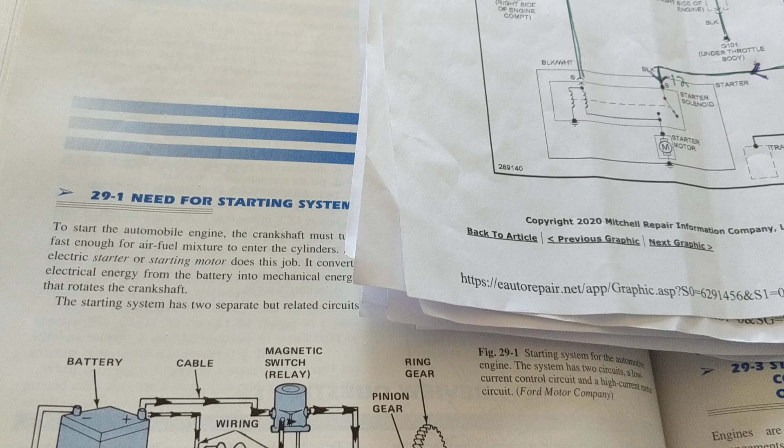Hello, welcome once again. How does a starter motor act and operate? This is a pictorial, but before we go to the pictorial, we studied the schematic. Let's take a quick glimpse at the schematic, and then we'll go back to it, and hopefully you'll have a better understanding.

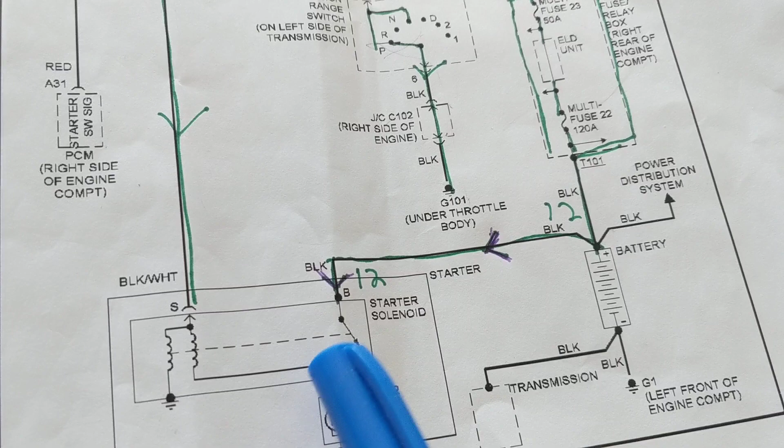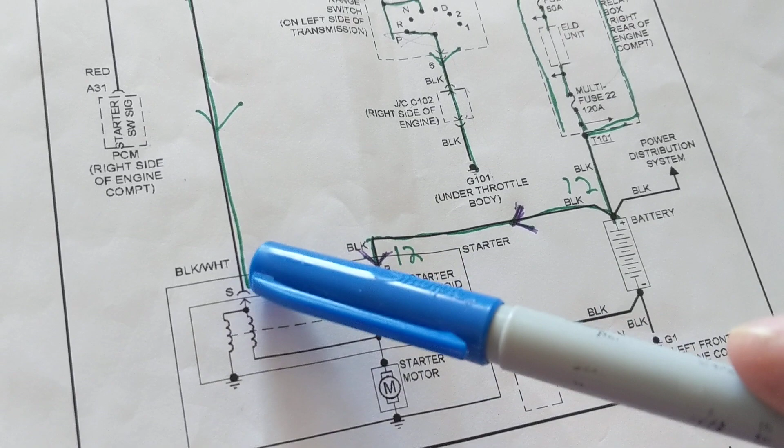The main purpose of this starter motor: there are two windings, and a relay they call a solenoid. This starter solenoid is actually a relay. It closes the contacts for the starter motor, and the most important point is for the high current to go through this thick wire from the battery. The low current also comes from the battery, but it goes through the windings and another starter relay. So low current is here, and high current, 200 to 300 amps, is through this thick wire that goes through terminal B, battery, and the other one is S.

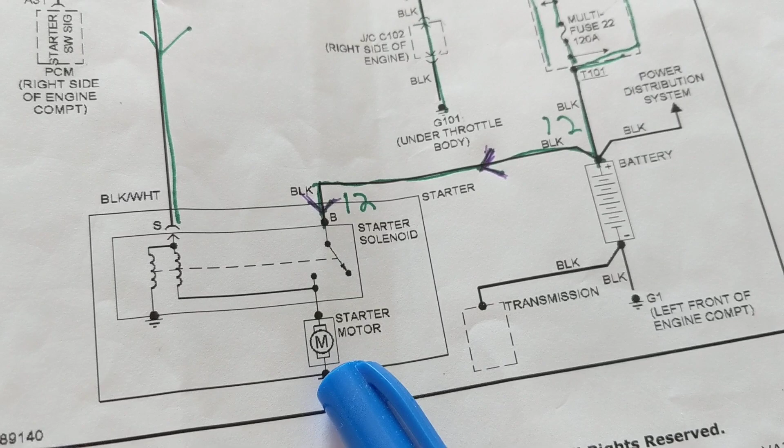Basically, we're using this to close this, to allow that high current to go through the starter motor, and the starter motor is also grounded. Let's look at it a little clearer to understand it.

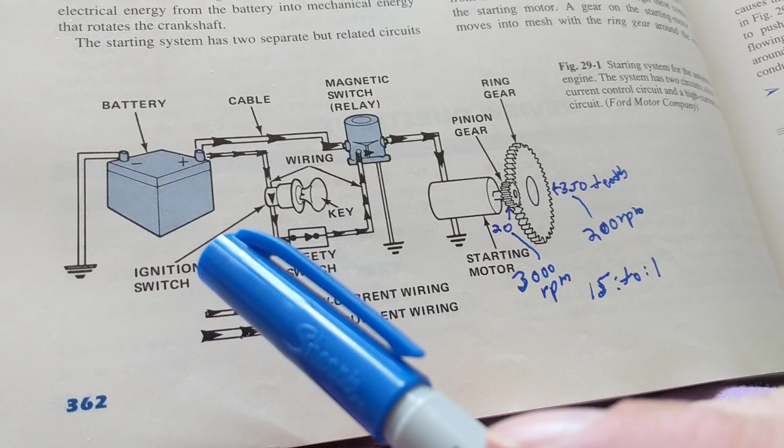This is the pictorial part of it. As we spoke before, the battery gives the proper current to the relay, which we call the solenoid, to activate the solenoid, which activates the starter motor.

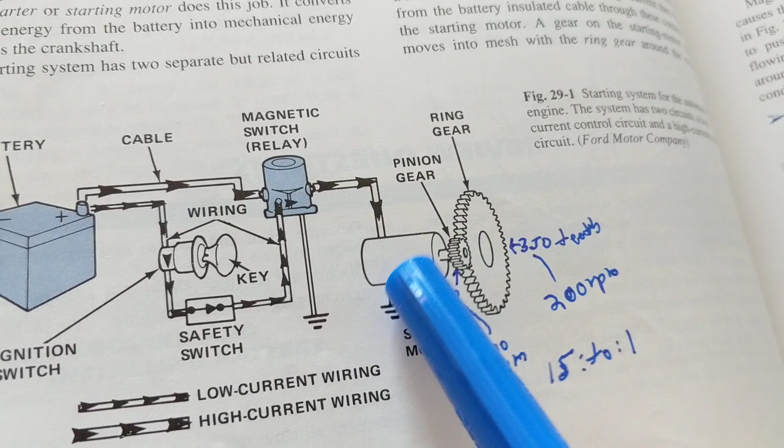Now the starter motor has something called a pinion gear, which goes to a flywheel, which goes to the crankshaft. The starter motor does not go directly to the crankshaft, in spite of what many people think. It does not have the torque to even try that, to turn an 8-cylinder engine.

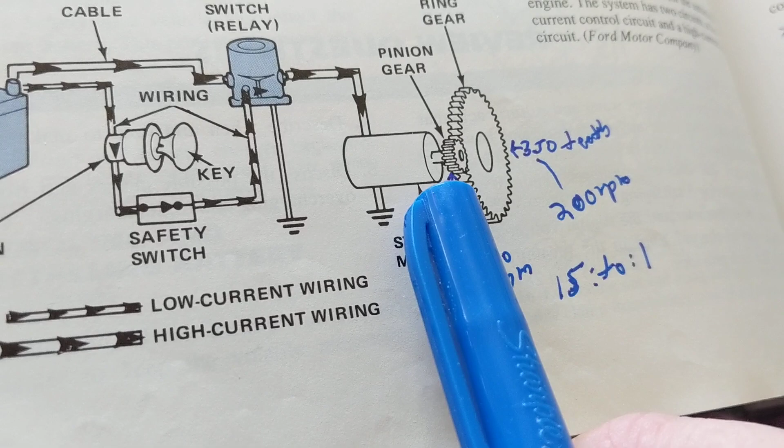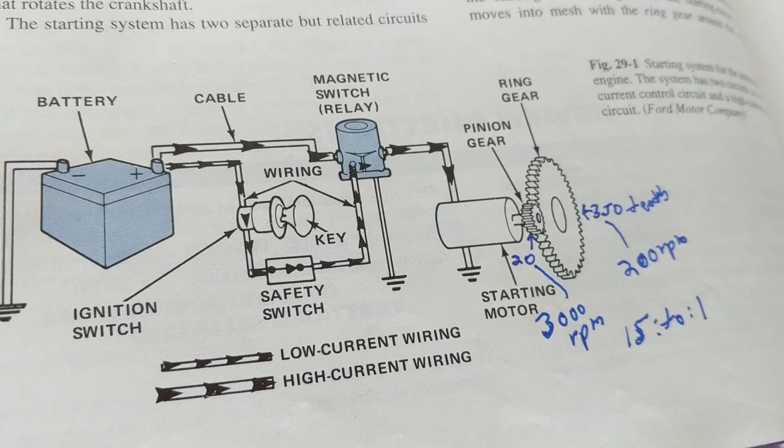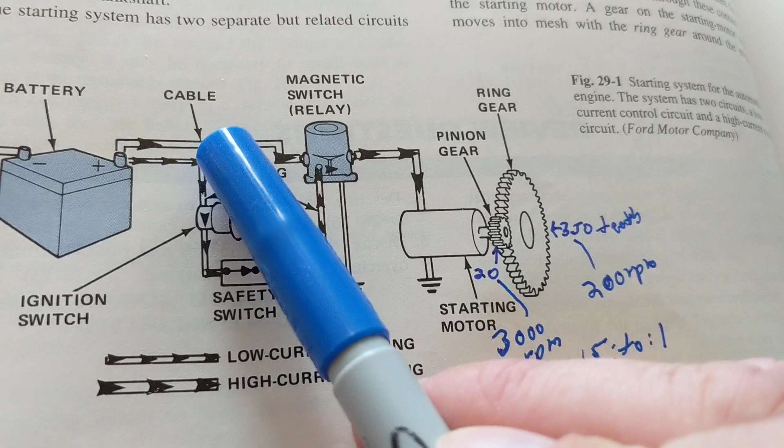It needs a flywheel. We said there's a solenoid, and in that picture, that solenoid is this one, the starter motor is this one, but actually you have another relay incorporated nowadays, so that's what's missing here. There should be another relay over here, but this textbook is over 20 years old, so it doesn't matter. The theory still stays the same.

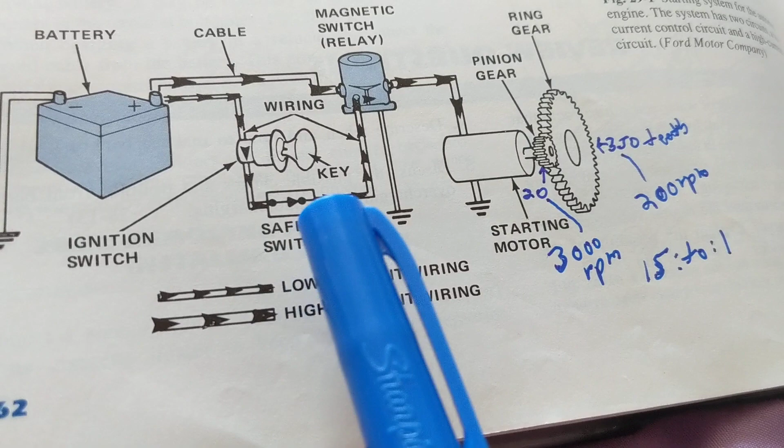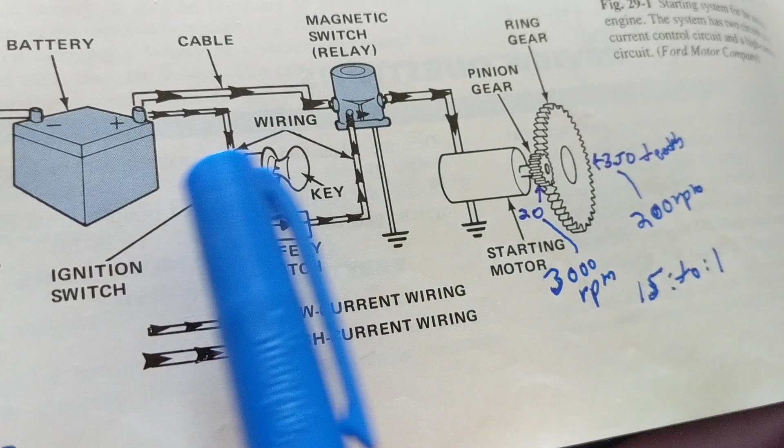We have a low current, you see the low current? Look at this thin wire, that means there's low current, through a safety switch, which is the park neutral safety switch on the transmission. Make sure you're in park, or make sure you're in neutral. You cannot be in gear, it means you cannot be in drive, you cannot be in 1, 2, 3, whatever, in the wrong gear. So this activates, the low current goes here to the solenoid, which we call the relay.

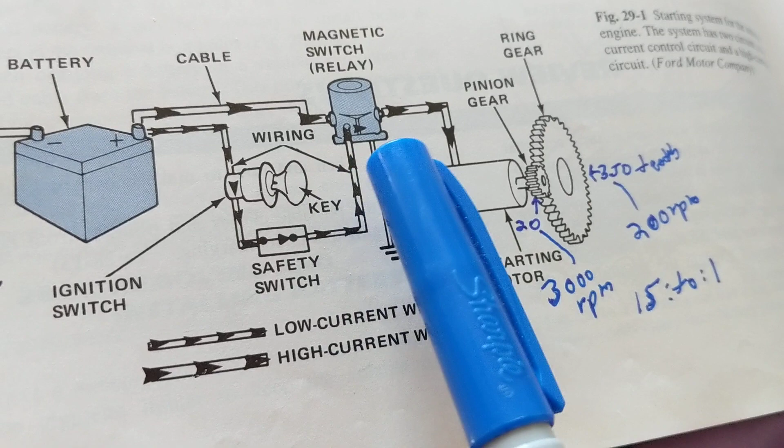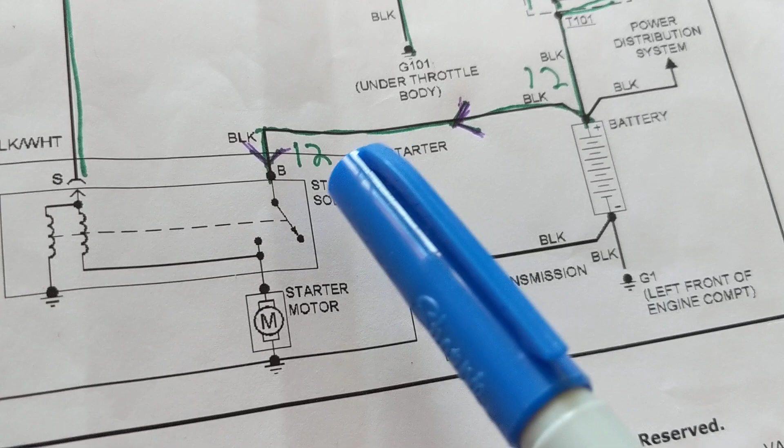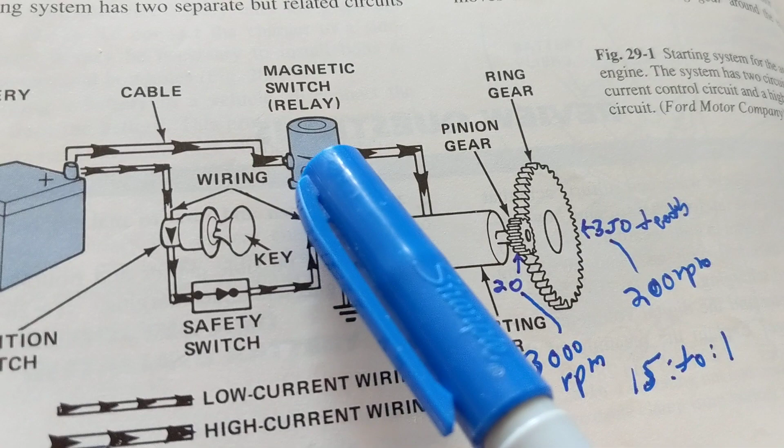The high current now goes from here to here, and to here, through the starter motor, through this solenoid also. You can see it over here, through the switch. So low current went here, and high current goes to the solenoid through the contacts, the switch contacts of it. So both go through the solenoid. Low current goes here to activate it, to activate the solenoid. The other one goes through the switch part of the relay that you saw in the diagram. Go back and rewind the video and you'll see exactly what I'm referring to.

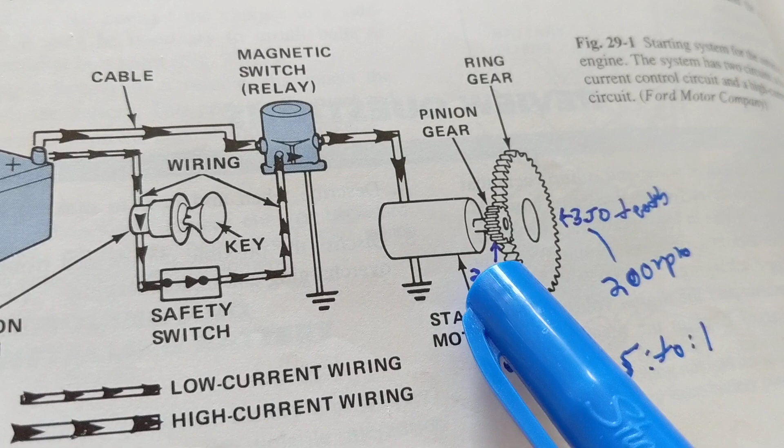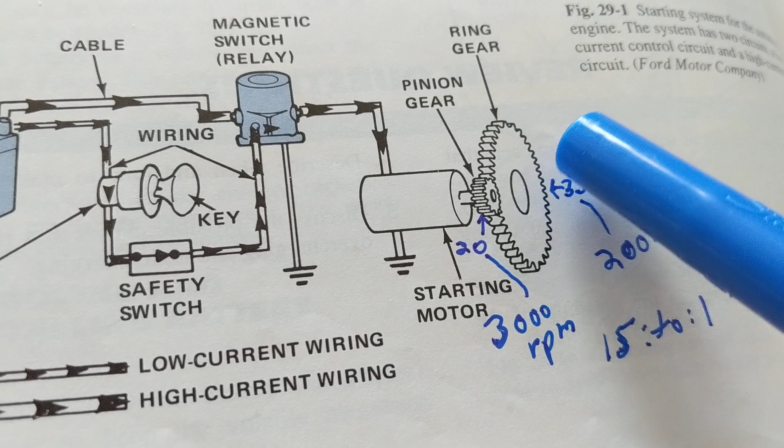So now we have two things that have to happen. We have low current by the small thin wire, and we have high current by the thick wire, activating this, rotating something called an armature, which will rotate something called the pinion gear, to rotate a ring gear, which is much bigger than this one, which activates the crankshaft, the engine.

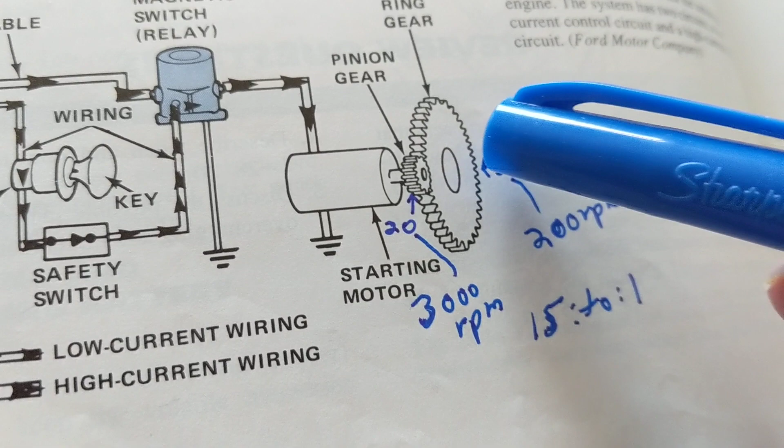Let's look at it a little more closely. The pinion gear is smaller, obviously the pinion gear is this one. Which is larger, the ring gear by far, of the flywheel. This can have, in this example, let's say 15 times more teeth. This is called the teeth of it. See, the ring gear has 15 times more teeth than this one.

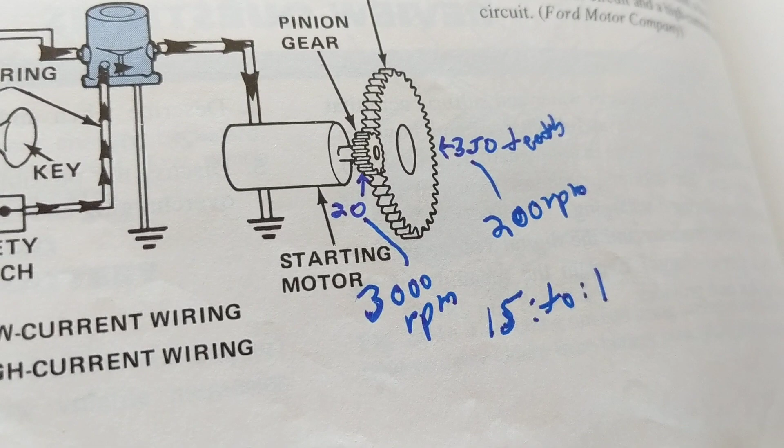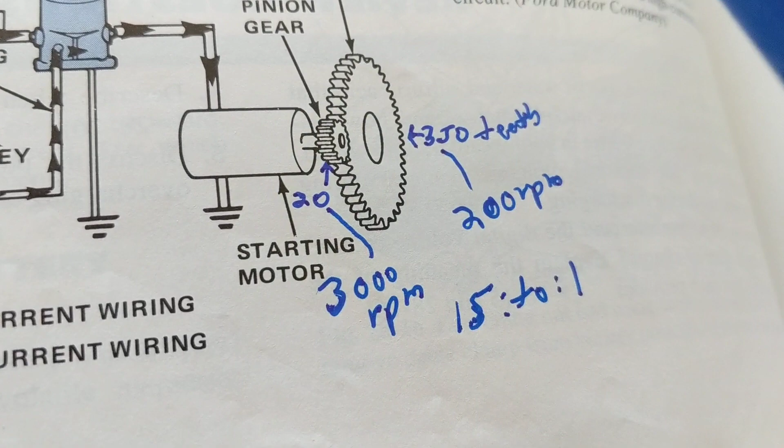So for example, if this has 20 teeth around the small one, 15 times more will give you 300 teeth. Just an example, okay, obviously it's not exactly this, but anyway, let's just think about that. So a small one over here, a big one over here, 15 times more than this. What does that mean? That means in order to get one revolution of this, I need this to spin around 15 times. 15 to 1 is the gear ratio. If you know transmissions or want to learn it, that's how it works. So 15 turns of this will give you one whole complete revolution of the flywheel, of the crankshaft.

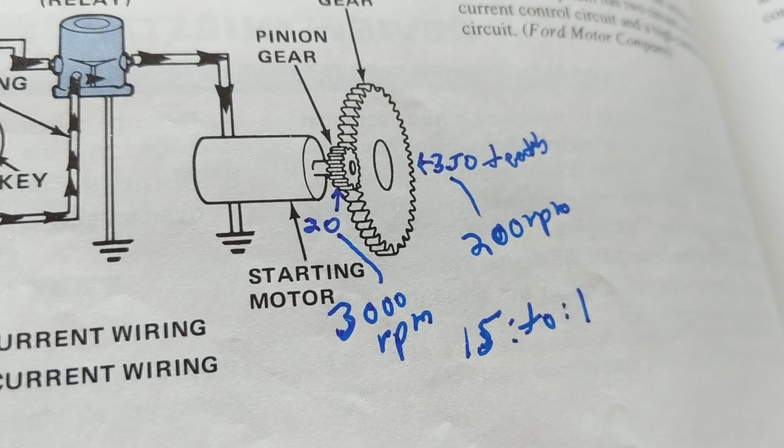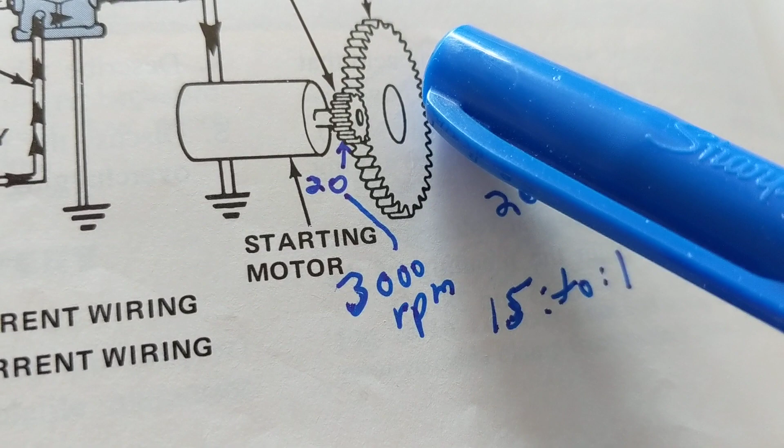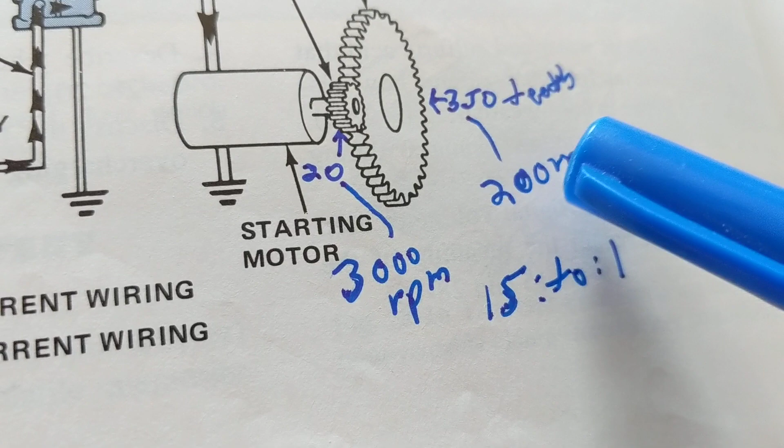It's a lot, that's asking a lot from it. So that's okay, that's the speed of this in relation to this. Once it cranks it, approximately, if you look at the gauges, it starts up the flywheel, the crankshaft, or the engine at around 200 RPM. But remember, if this is 200 RPM at the crankshaft, what's the gear ratio? 15 to 1. So if the crankshaft is going at, let's say, 200, and it takes 15 times of this to turn this one, the speed of this is 15 times more than the crankshaft, which means this is 3000 RPM. If the crankshaft turns at 200 RPM, the gear ratio is 15 to 1, this is 3000 RPM.

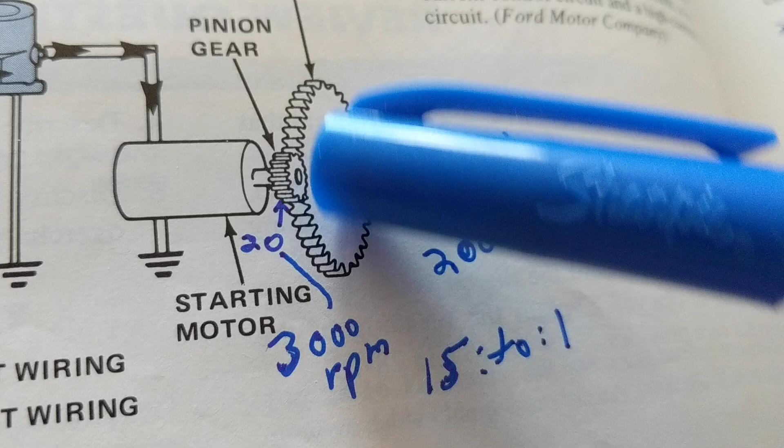The speed of this is 3000 RPM. I know it's a little confusing, not really an important point, just an analysis. You're turning one 15 times to turn one revolution. This has more teeth than this, so this speed will be much higher. The smaller one has to turn 15 times until this one gets to one complete revolution.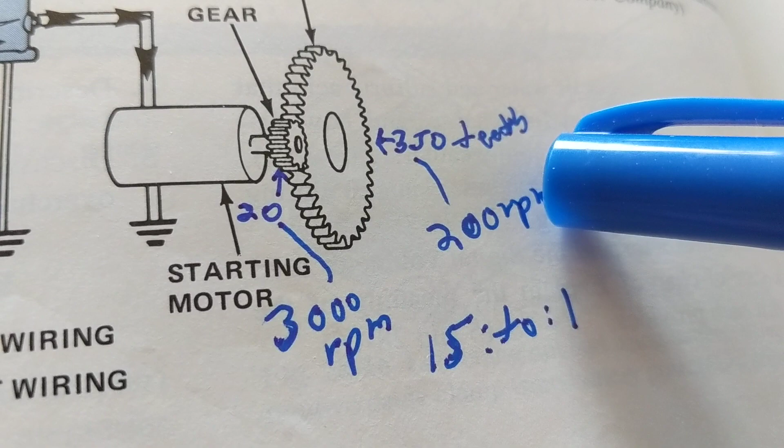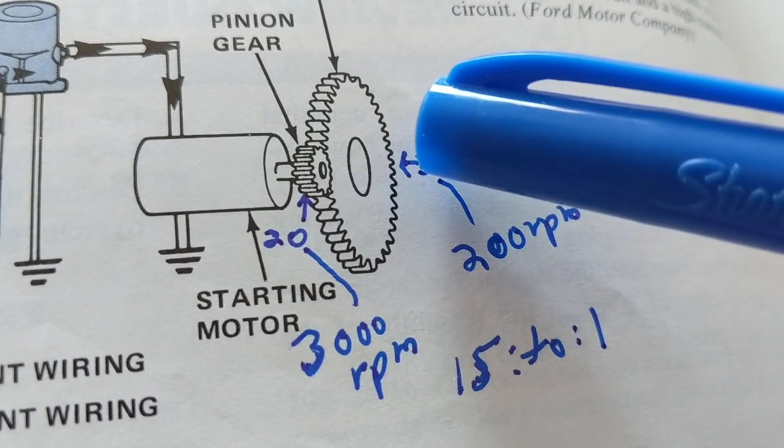So like we said, if the crankshaft is 200 RPM, usually around starting, this will be 3000 RPM. But there's a problem: once the engine speed increases, this will increase 15 times more than this, at an overall too high speed. This can go to 10,000, 15,000 RPM compared to this. The armature does not like that.

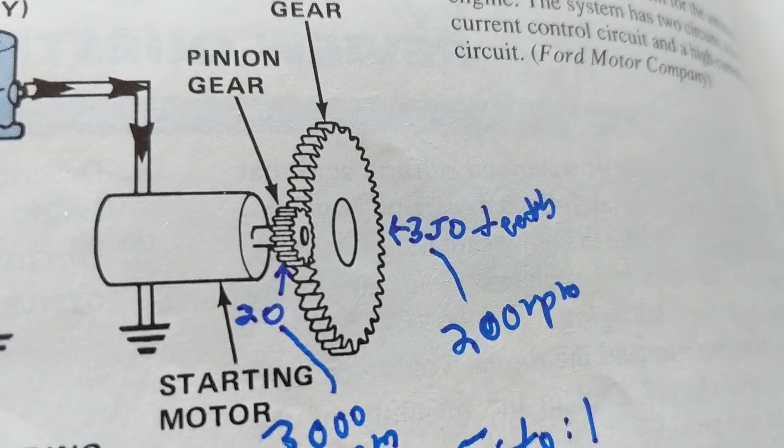So we have something called the overrunning clutch in the starter motor. Don't want to get too technical—I'll show you a picture of it so you'll understand it much better, hopefully. But you have to understand this part of it.

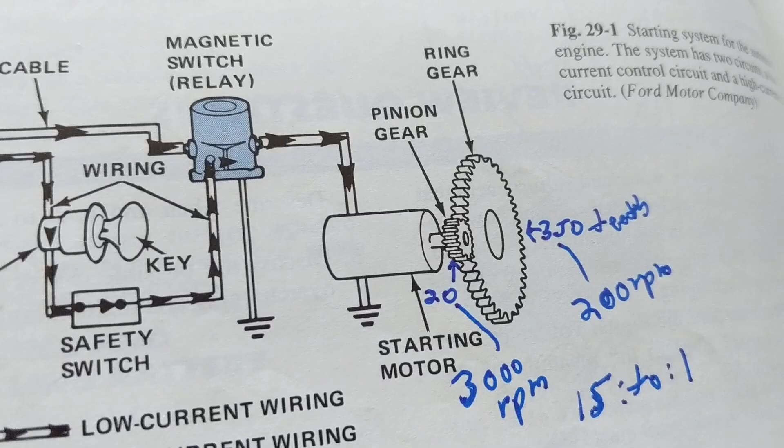Very important: first, we have to activate the low current in this to close the contacts for the high current to flow, to start the small gear teeth on the pinion gear, which meshes with the ring gear to turn the crankshaft. Very important. As you can see, you need a good battery.

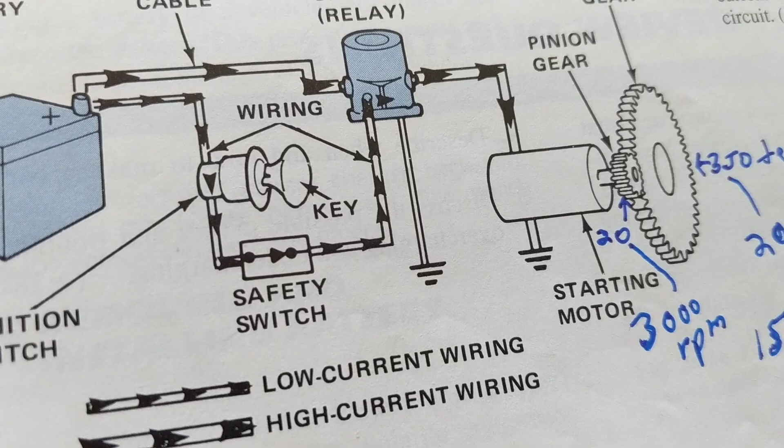At the beginning you have 12 volts, but when this cranks all that current, it takes the strength out of the battery, so that battery will drop to about 10.5 volts. So if you know that battery is 10.5 volts, you know it pulled a lot of current to start a motor to turn. Or your battery is weak, and if it doesn't turn it, your battery is weak.

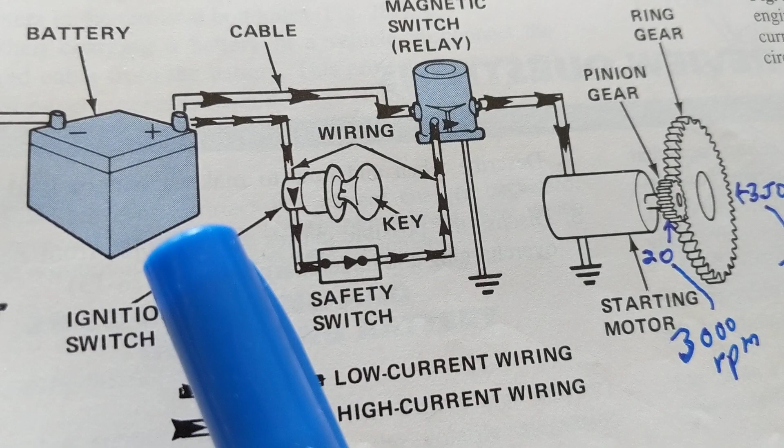Maybe the alternator, maybe somebody started to crank the engine thinking it's a no start, but it was a crank and no start. When you crank that engine over and over, you weaken the battery. So it's not a no start, it's a crank and no start—that weakened the battery to 10.5. But we're speaking here where the starter motor is working, and if it's working, expect about 10.5 over here.

Let's look at a much easier diagram so you'll understand it a little better than what I just explained.

We just said the pinion gear—think again, this is the flywheel that I just showed you. This has more teeth than this. We said it takes 15 revolutions of this small one to give you one full revolution of this one.

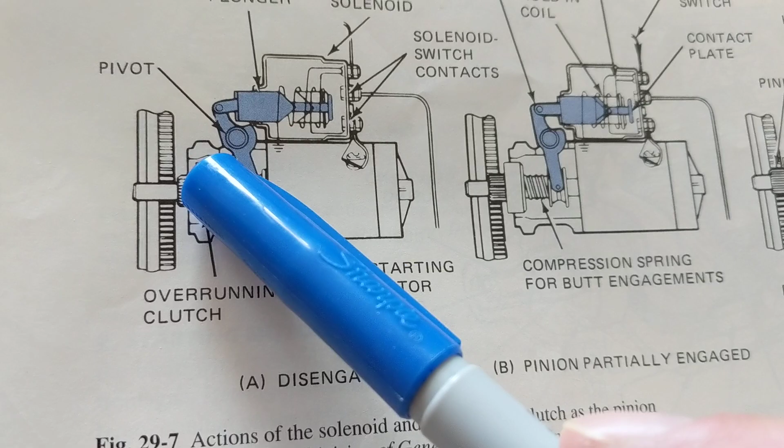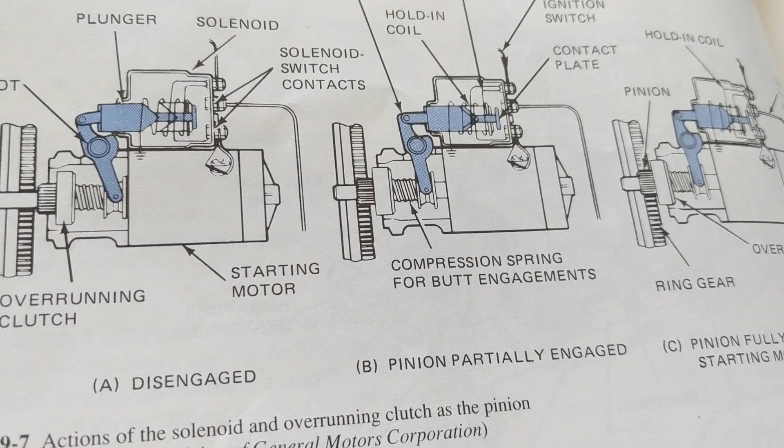Fine. Now, when it gets engaged, when you turn the ignition switch, you're trying to make these two mesh together. Mesh means they make full contact with each other—that's what the word mesh means.

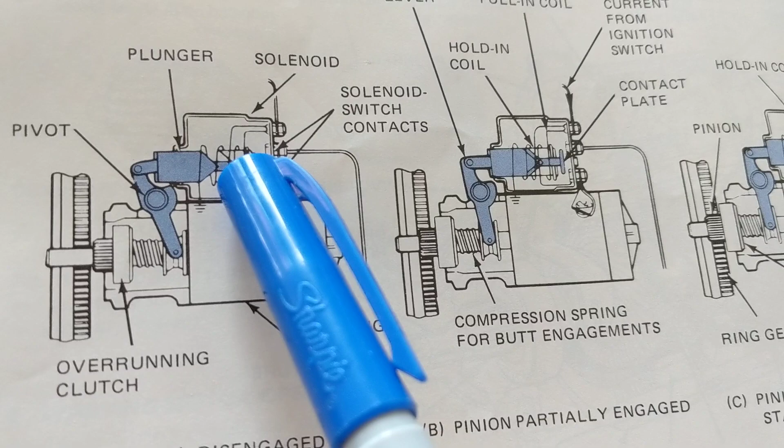So in this picture, as you see, this is the plunger. There are two coils over here: a hold-in coil and a pull-in coil. As you see, the picture speaks better than I can explain—a hold-in coil over here, and then you have this one.

You see this one over here? This is the pull-in coil. Two coils over here that we saw in this picture—remember we saw this picture? See, two of them: one is a pull-in, one is a hold-in.

That's what you see in most diagrams nowadays, two of these coil wires. That's what that was referring to. That's why I brought this diagram, hopefully to make that schematic a little more clear, because otherwise it's hard to understand.

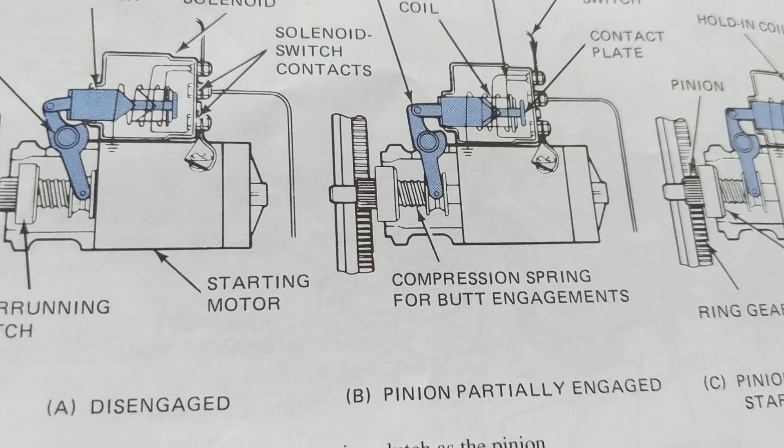So this shift lever, as you can see, needs to do something—it needs to pull this out to mesh with this. Once current comes from the ignition switch, it comes into this contact over here. There are three contacts: 1, 2, 3.

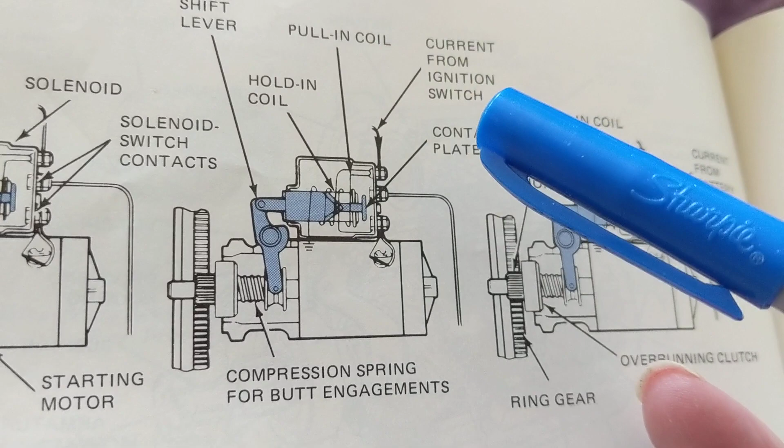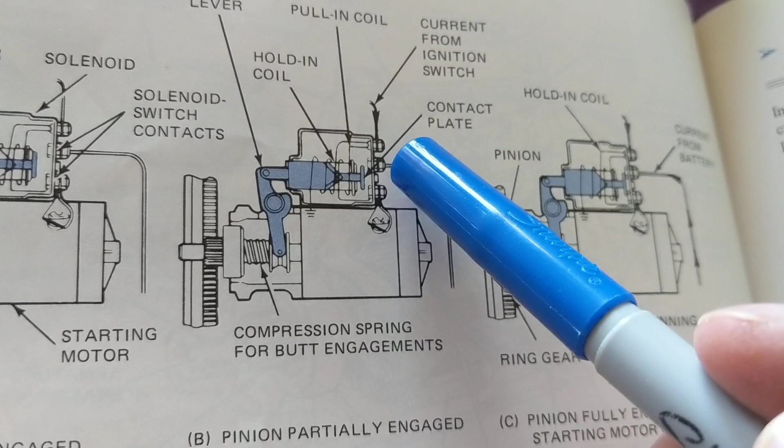Now, very important, this is the low current that we referred to. The high current has to go through here to get to the starter motor—that's the heavy current, this one over here. This is the small current. It engages this coil, and once it engages this coil, it'll push this out.

See the difference? This is not engaged. See the pinion gear? It's not making contact with this. You see the difference over here now? It's making contact, but still there's a problem.

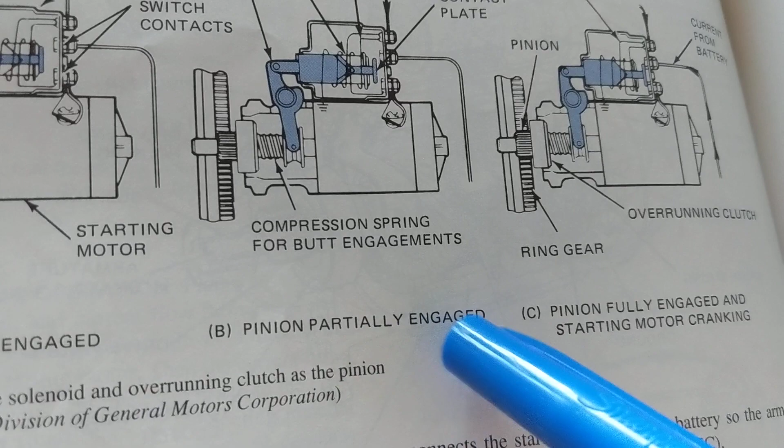What's that problem? Pinion partially engaged. You can't see that if you look at it—it looks okay, like they're making contact, but they're not making full contact. Let me show you something that hopefully you'll understand a little better.

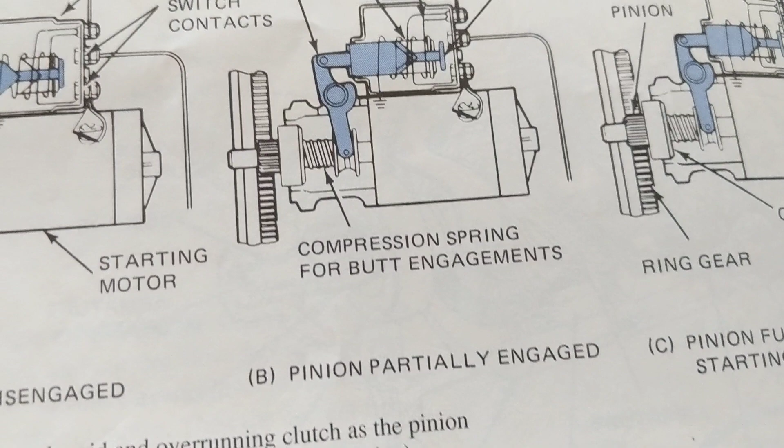This is why I use a pen. You see this gap over here? This is not making full contact with it. You see this gap right here? This has to be closer in.

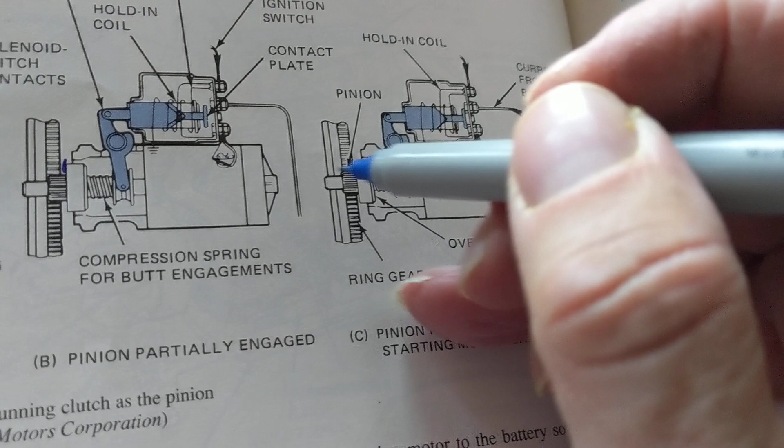When this is closer in, now look at the difference. You see this gap over here I just drew? There's no gap over here—this is making full contact with the flywheel. See the difference? This is making partial.

Let me focus—this is making partial, and this is making whole contact. See? No gap whatsoever. That's what you want. If this makes only partial contact, then you hear those whining noises and all those noises that you hear.

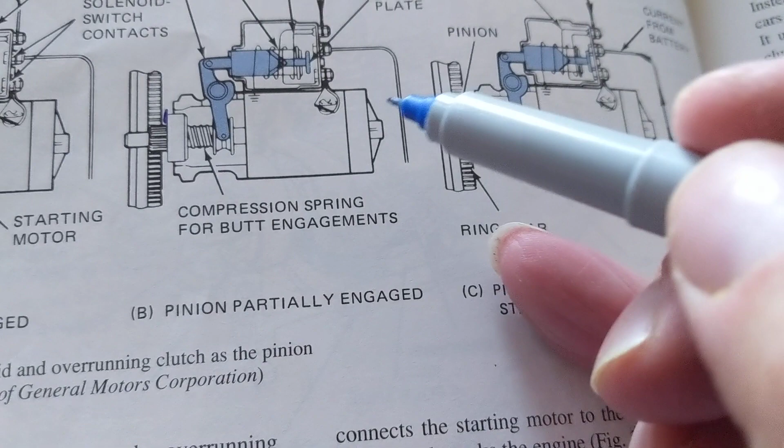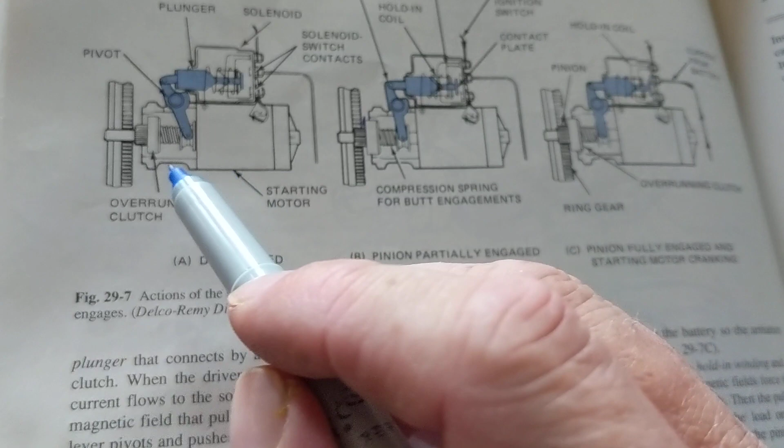It's not being engaged completely. That's what's been happening. So the current comes in, lets the plunger push this against this. We started out with this. Look at the difference. We went from here, no contact, to full contact. This is what you want.

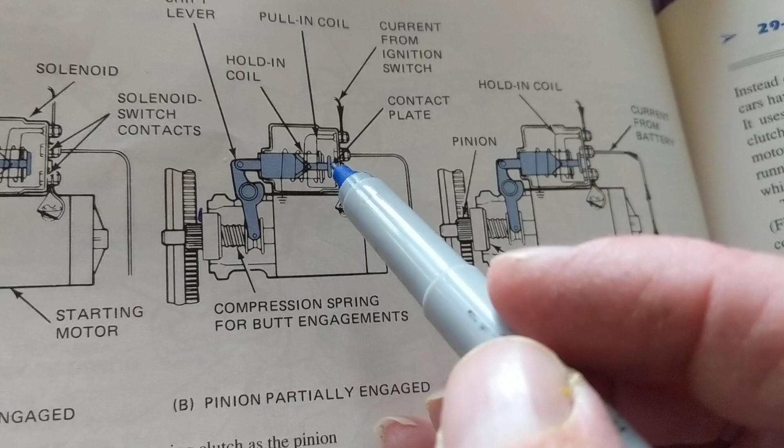Now what happened? Pull-in coil works, hold-in coil works, it pushes this out. From here to here, there's a little contact plate. You see this contact plate? You know what this does? When this works and both coils work, it brings this back against this too.

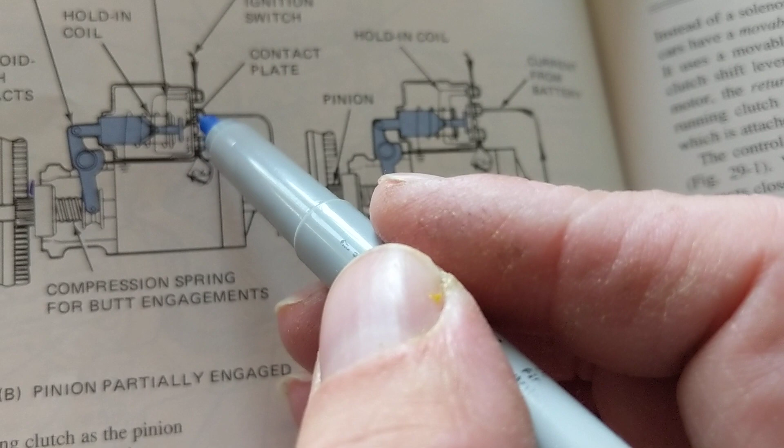Look right here, see this? Right now this is open, these two contacts are open. When this works, the hold-in coil works and another one works, guess what? Now the contacts are making contact from here to the starter motor. What will that do? Take a guess.

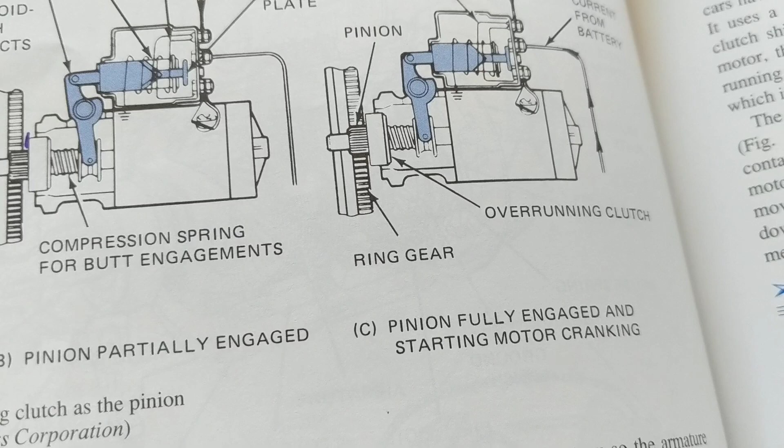That heavy current that's going from the battery that we started from, now it can go from here through the switch of the solenoid to the starter motor. And that's the picture that we saw right here. That heavy current, the black wire in this one, the black current going through B, going through the contact of the solenoid when this is engaged to the starter motor.

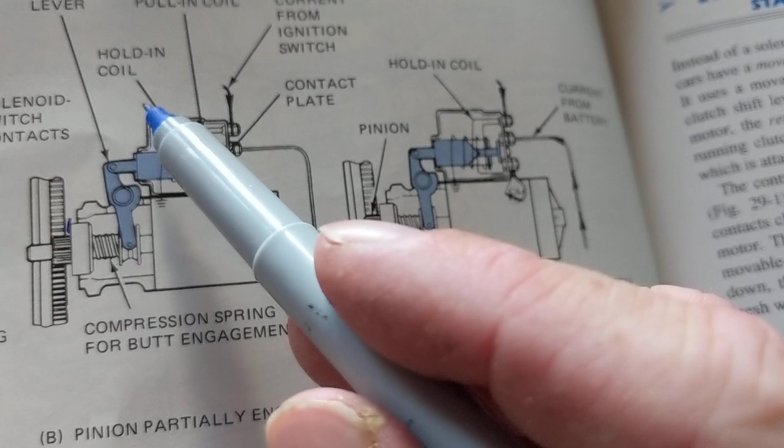Let's look at it closely. If you need to, go look at the video to review it. See, no contact, nothing. The heavy current cannot go now to the starter motor. So we need both coils over here. First we have to push it, then we need this to give the current to spin it.

So now it's making contact from here to here. From, you could call it B, to the starter motor. From here to here. Now we have a path for current to flow. See, now the heavy current has no path. There's no contact. Now there is contact.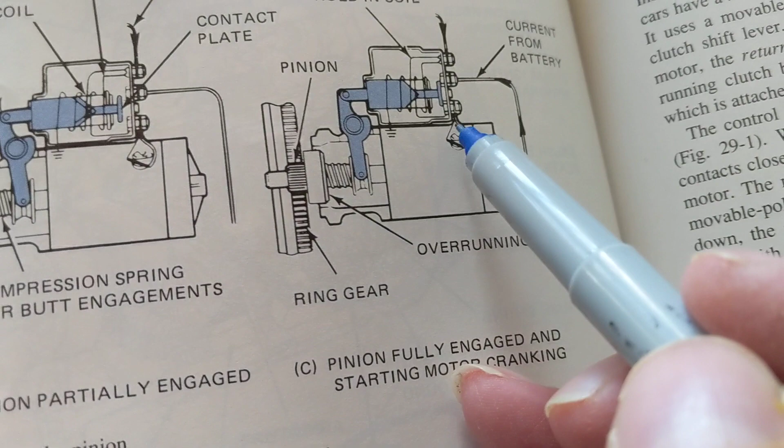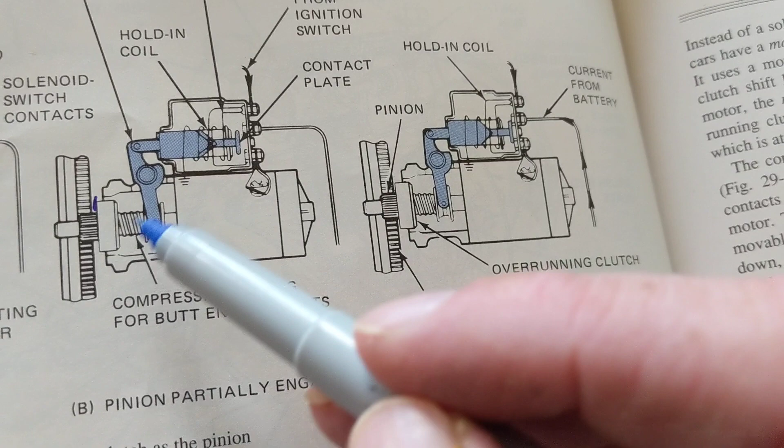Now it can flow. We started with the ignition key, the coil, engaging this, giving enough current for this, but we still need the heavy current to turn it. We mesh it together, then we need the heavy current to start rotation on it. The armature needs that. That's what's going on, if you look at pictures.

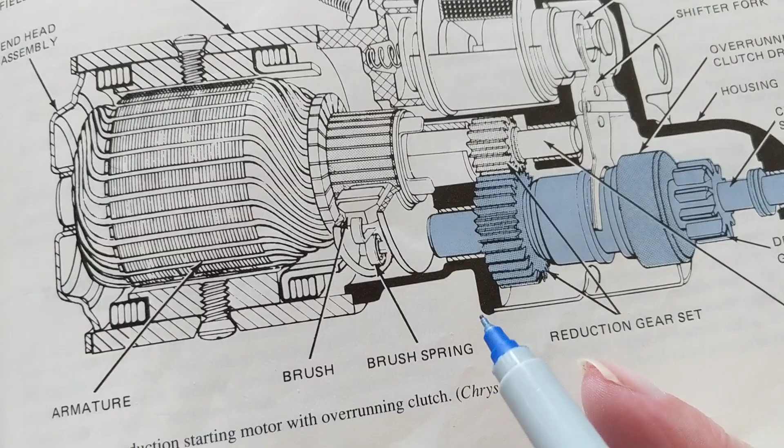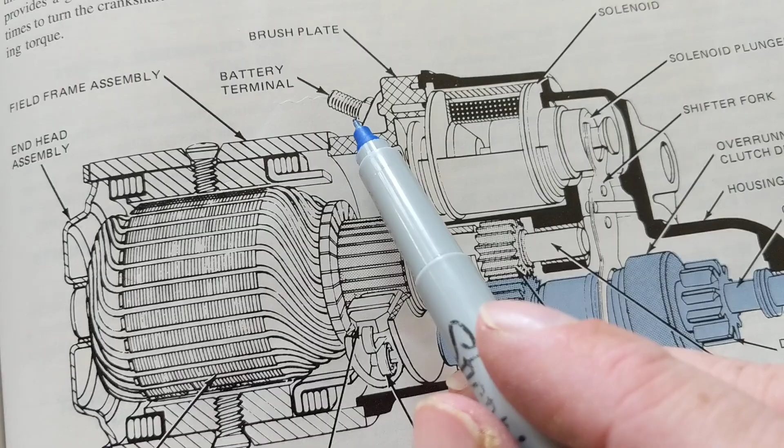This is the pinion gear. Sometimes they have something, this is the armature, that's what rotates. And then you have the brushes, and then you have a going out to ground, which is the case, is the ground, but the battery terminal goes over here. That heavy current goes in here. This is the solenoid part of it.

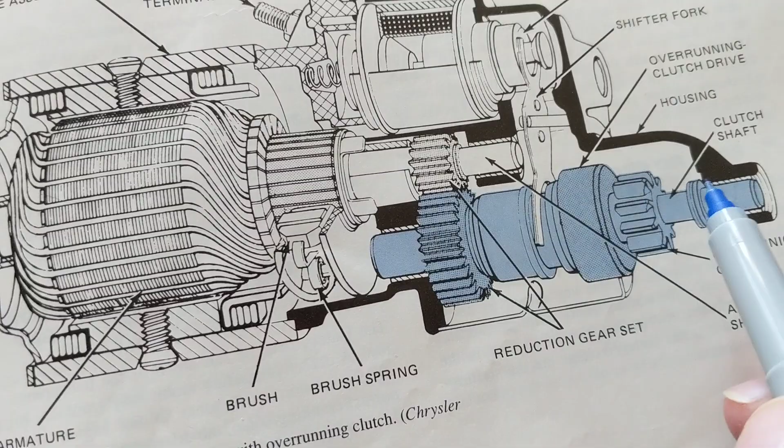Remember, we just said two coils are activated. When that happens, it closes the contact, and now the battery can make this spin at a high rate, to spin this at a high rate, to spin the flywheel, to spin the crankshaft. First this is engaged, then we make it spin.

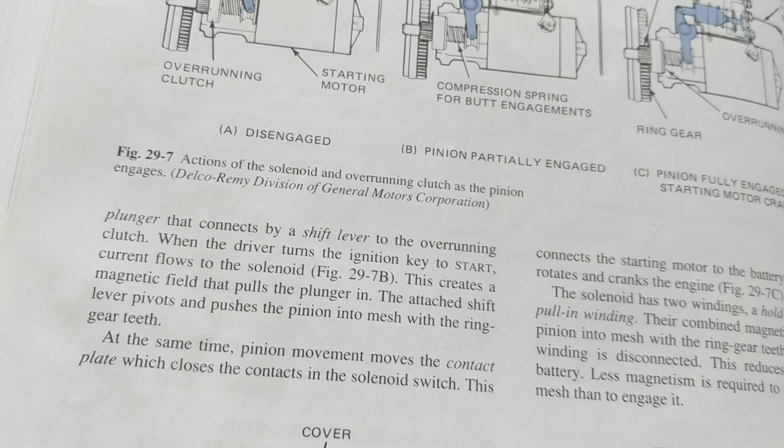Anyway, I think this was helpful, I think, because it's hard to understand it, but basically that's the easiest way to understand this.

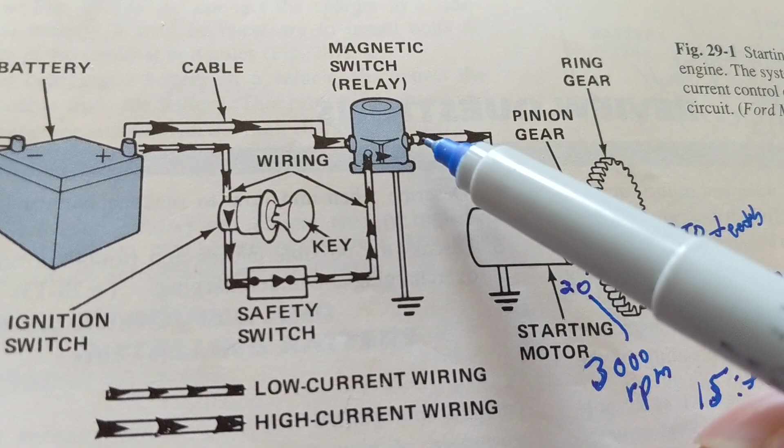So now when we go back to the original one, let's go to the original one. Now do you understand this picture better? Right, I think you should probably, because look at the low current going through the solenoid to the pull-in winding, right, the hold-in winding, right? It meshes this with this, correct? It meshes them together, first thing.

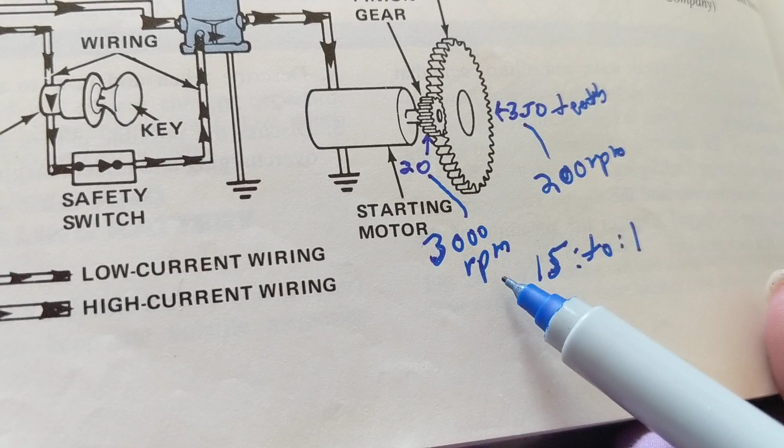But that's not enough. We still need a heavy current to rotate it. Then they rotate it, that's when you get that crankshaft to really spin. And remember, 3,000 RPM compared to 200 RPM. When you look at the gauge at the RPM, you'll see it's a low RPM, 200, 300 RPM. But remember, that starter has 15 times more than this speed.

I think this explains it much, much better than I can ever draw in diagrams or things like that. I'm good at schematics, drawing those, but not this, believe me.

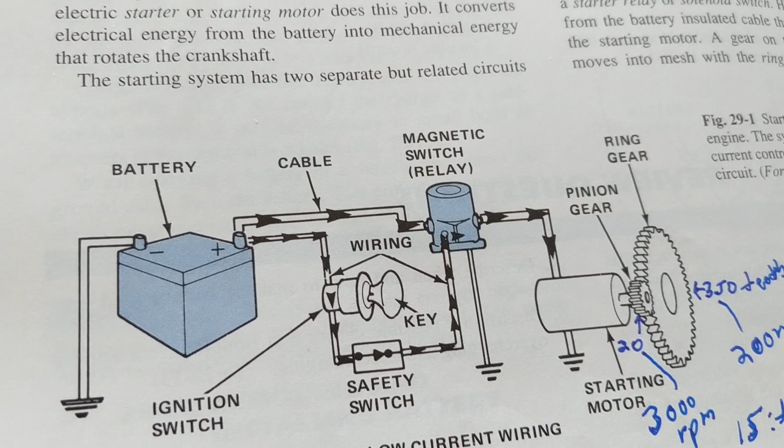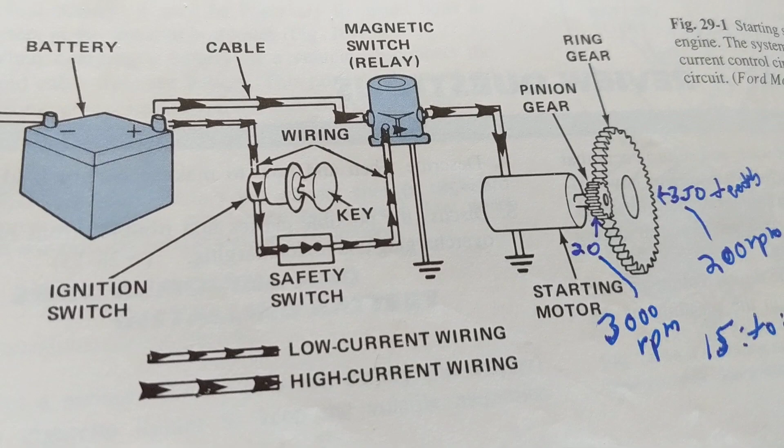And if anybody can tell me why, or leave it in the comments, the most highest paid YouTubers make $20 million. Can somebody leave a comment to me? How can somebody make $20 million from YouTube? I would sure like to know that. I'm sure everybody else would like to know that. Maybe Adele? I don't know who, but how do you make that much off YouTube videos?